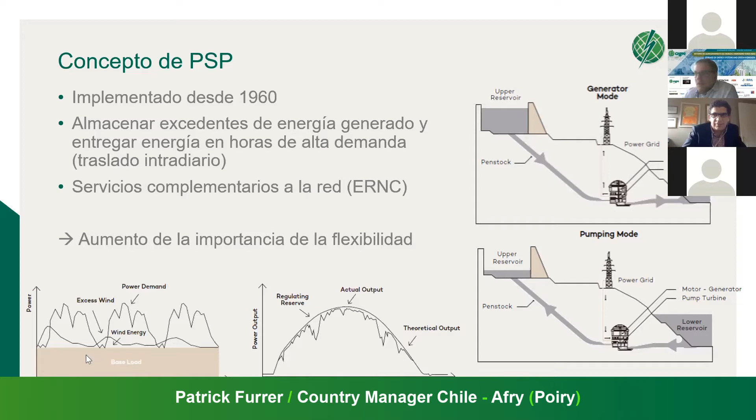This also means the importance of flexibility, and how fast we can adjust consumption or generation power in very short time, has increased, to provide complementary services or ancillary services. Well, as we've seen in other presentations today, we've got this picture with the different technologies available.

Let's figure out how well pump storage can fit here. It has a range for long-term storage capacities, typically due to higher power or longer hours, precisely to take advantage of a scale economy. But it also has certain limitations, certain constraints that, over time, with technological development, have been improved. But at the end of the day, I think in terms of flexibility and storage for the energy matrix, it is a set of different technologies where each one has room.

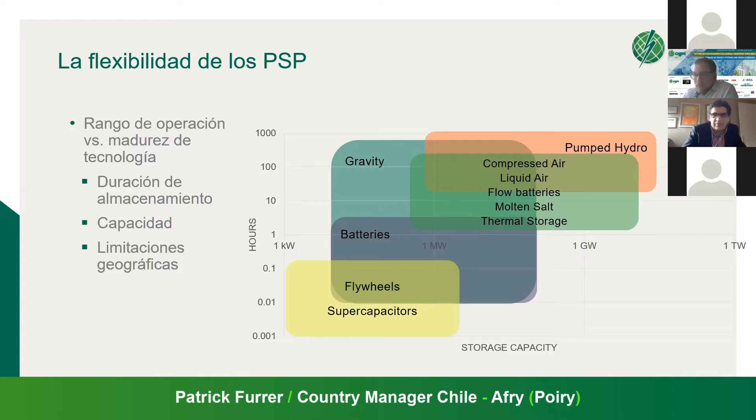An important item is maturity. There's a lot of development across different storage technologies: electric storage, thermal storage, and of course hydraulic storage, which is the most advanced in terms of development. Sometimes it might be important when you reach the moment of funding a project, or you look at the reliability of the technology, which is also important. That's why more than 90% of the installed capacity worldwide comes from this kind of technology.

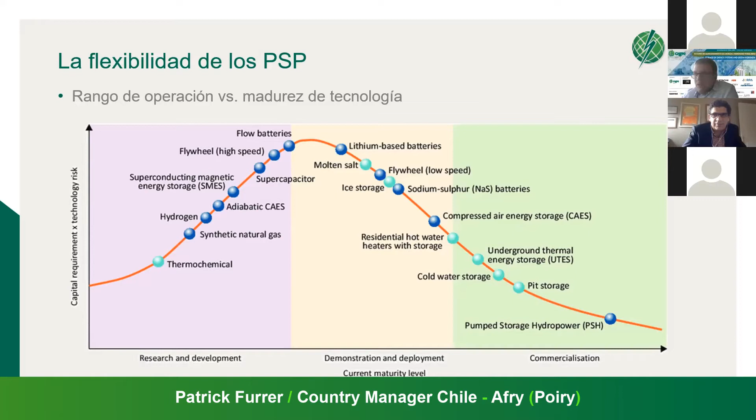Today, my purpose, my goal is to show you a little bit what's available in the market today and what kind of flexibility the different technologies may provide.

The most simple we've got are reversible turbines at fixed speed. Just like any other hydraulic turbine, today they have their operation point, and it could be shown with the curve on the right in the pump mode, with one duty point, and that's it. This is the simplest equipment and of course the cheapest, with a lower cost. On the other hand, it has a range, an operation range in terms of generation.

In comparison, then when flexibility started to be increasingly stronger, as well as ancillary or complementary services, in particular in interconnected grids across Europe, equipment with variable speed generators and engines started developing.

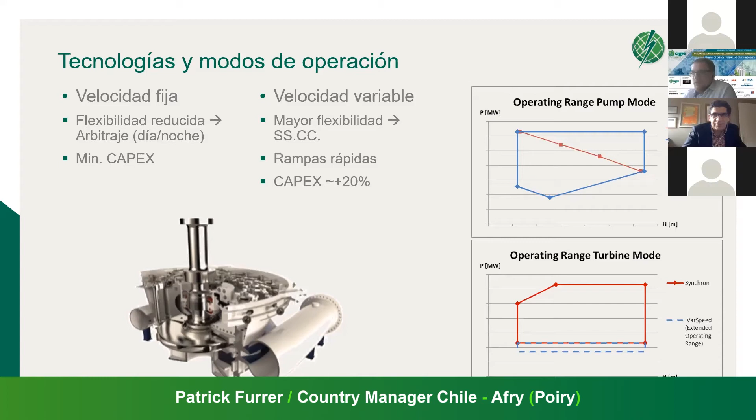Lately, the latest technology aims at projects with higher heads, with higher hydraulic pressure, and also wants to increase the operation range to provide even more ancillary services and more flexibility in the dispatch. That's basically a consequence of the electric market: there's increasingly more renewable energies in the different energy matrix and more intermittent energy being introduced into the grid. That's why this is quite similar to the development of what's going on today in Chile, with high penetration of renewable energies and everything which is being planned.

Then these ternary units, have two pieces of equipment separate: a turbine separate from a pump. Many times, due to the pressure, they have many stages. In the picture below, we can see a three-stage pump, which allows a very quick shift in the direction of the flow.

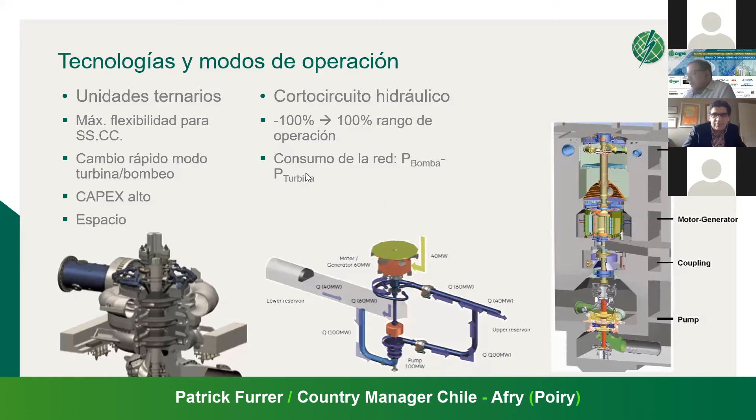Unlike other storage systems, the hydraulic storage at the end of the day is a consumer, but the efficiency of the cycle depends upon many things. From the energy consumed, we've got electric equipment, mechanical equipment, and civil works, which depend increasingly more on what the full project and civil works layout is like. Typically, the efficiency of the full cycle is around 70 to 80%, sometimes over 80%.

Compared to batteries, for instance lithium-ion batteries, the wearing of these systems is almost zero, and they have a much longer lifespan compared to batteries. In Europe, there are projects in operation for 80 years. Of course, maintenance is in place and some changes are made, but it is an asset with a very long lifespan.

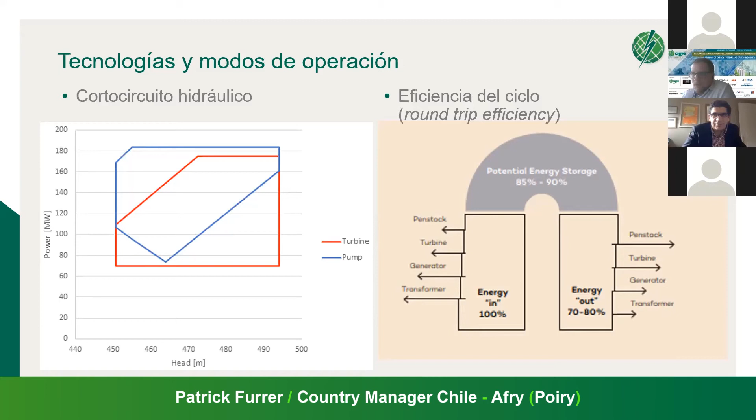As mentioned earlier, the range increases as more technologies are introduced, but we are typically talking about seconds up to several hours or even several days.

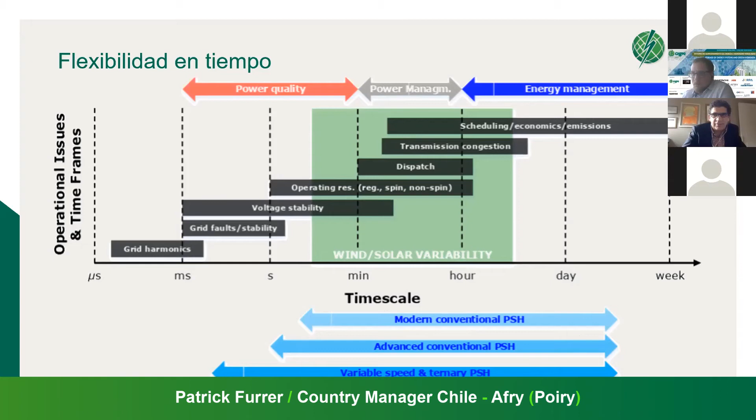And here I put in terms of time, between generating 100% up to pumping at full capacity. That also depends upon the requirements you put to your project.

You may reach up to 90, 60 seconds or a couple of minutes, depending upon the main purpose, how flexible, how fast the ramps have to be, how quick you want to deliver or consume energy. It is not as quick as other systems we've seen today, but I think it could accommodate very well to the different requirements by most of the electric grids.

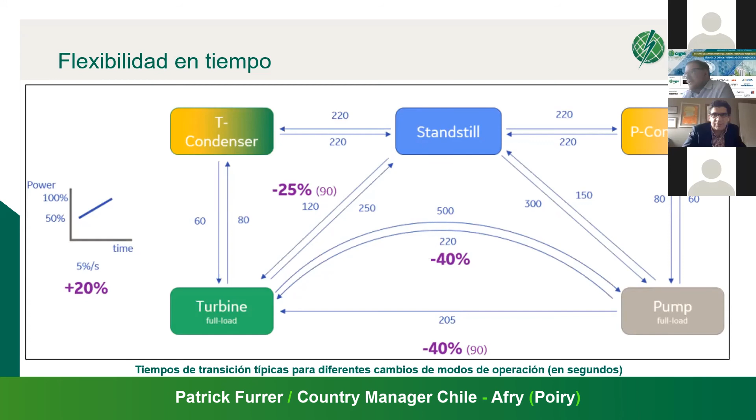At the end of my presentation, I've got a couple of examples we are developing today that show what is possible and also a trend. These are examples that could be interesting at the moment for Chile.

The first project is aimed for the interconnected market in Europe, here in Finland. This is the deepest mine in Europe, which is in the process of closing its activities within the next few years, and they are assessing what to do with this later on.

One of the studies we did was assessing whether we can reuse part of this infrastructure for a storage system. Here with 1,400 meters, the nice thing is that the volumes of water are smaller because of the height.

It is a ternary unit with a pump and a Pelton turbine separate from each other, and that provides the full flexibility range. This in the context that in Scandinavia, they are developing a lot of wind projects that will require that balance.

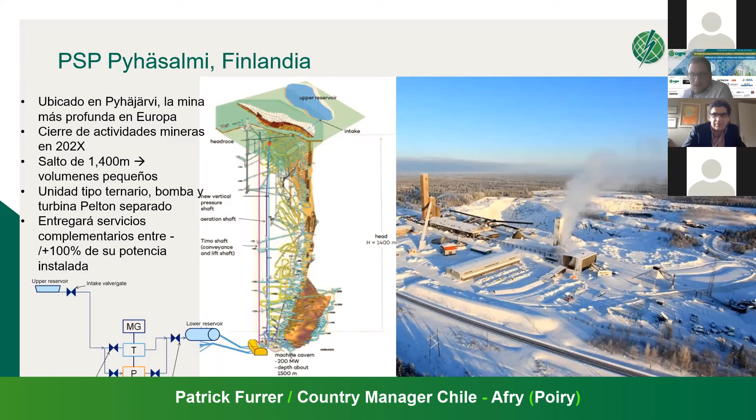The second case is a project in Israel. This is something very current, in a desertic country like Chile in the north, with similar conditions expected in the future. In this case, they found the problem that they cannot develop more solar energy. This is a multi-purpose project because at the same time it also stores water for crops.

This project is going to provide about 1.3 gigawatt hours in the future, and it will allow the installation of renewable energies in this region.

That is basically my purpose in this presentation. Hydraulic storage has some limitations, as I mentioned at the beginning, but there is technological development, and there are also ways for us to work with or take advantage of these topographic constraints, and to get around the constraint of the scarcity of water. We can show that there's room in the energy transition, with high penetration of renewable energies.